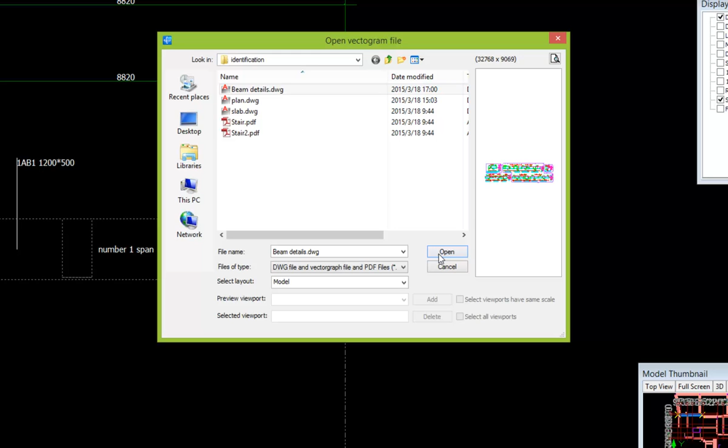Identify beam reinforcement details. Beam reinforcements can be calculated through identifying beam reinforcement details. TRB supports the identification of CAD and PDF drawings. Select the needed drawing, enter the proper scale in the dialog box.

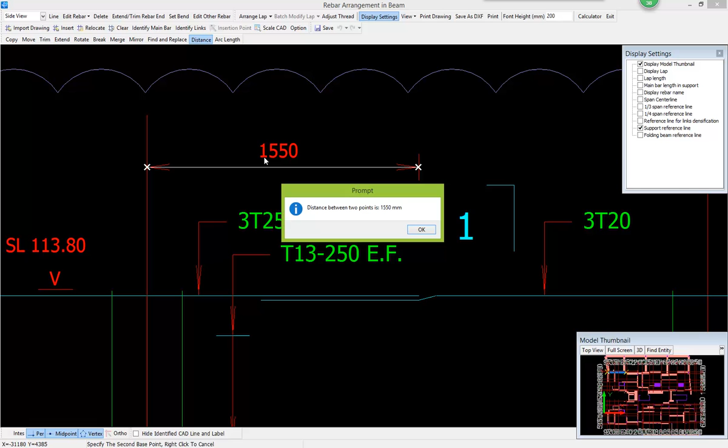You can use the distance function to measure the distance between 2 points so that you can see if the scale is correct. If not, you can click Scale to adjust it. There are two kinds of rebar identification: Identify main bar and Identify links.

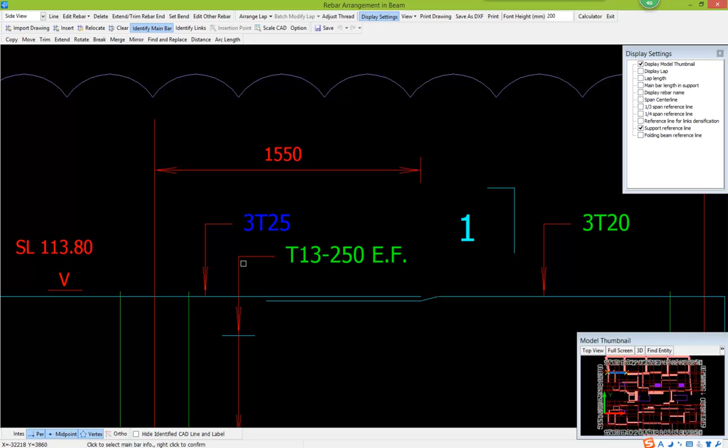Let's take a look at Identify main bar first. According to the hint at the bottom, select the bar info and bar lines. Then select the rebar type and confirm to generate.

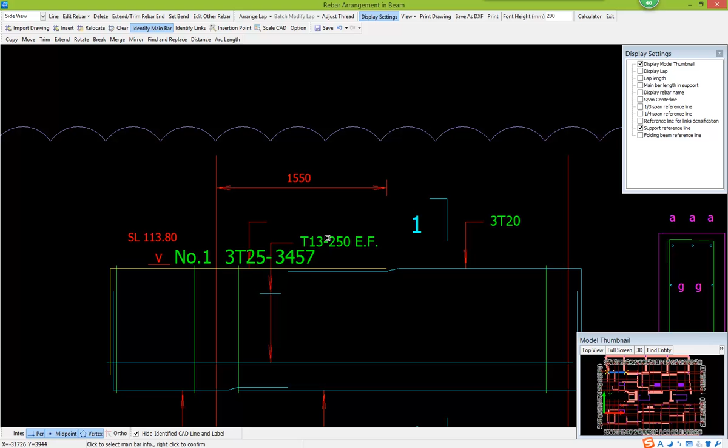If there are too many entities in the drawing, which makes it hard to tell the entity's identification status, you can choose to hide these identified ones by checking this. As for main bar info that contains spacing data, you need to input the correct section size as it affects the number of main bars, and the number will be calculated automatically based on the section size.

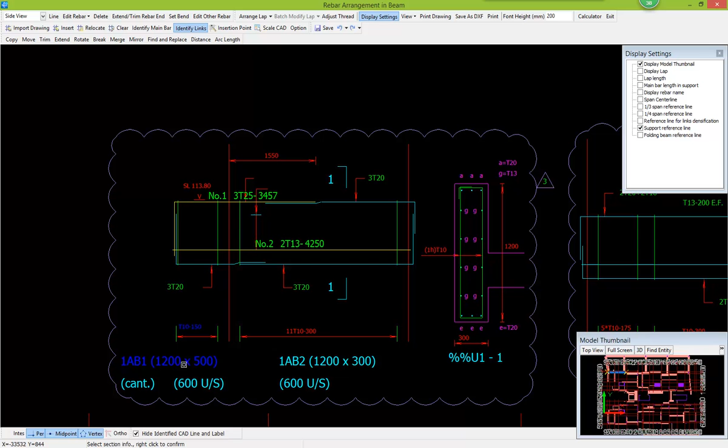Now let's go to links. Select links info and section size info, and then draw a line with a certain length to describe the range of links. The quantity of links, depending on the format of links info, is identified directly from the links info, or it is calculated based on the spacing info and the specified range.

The main bar info affects the calculation of links, so you have to input the correct main bar info. Software reads the section size as width * height by default. If the drawing gives the opposite one, you just have to check this item and the data changes accordingly.

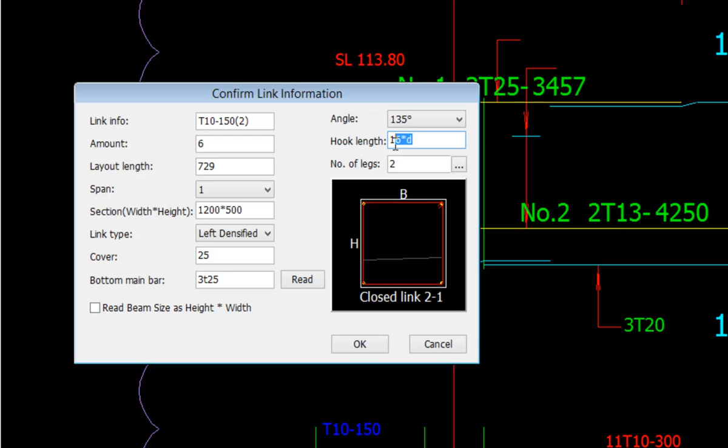Hook angle and bending value take values from project settings by default. Legs info is identified from links info, and it can also be editable. Click the ellipsis button to select corresponding link drawing. Check the info and then generate links.

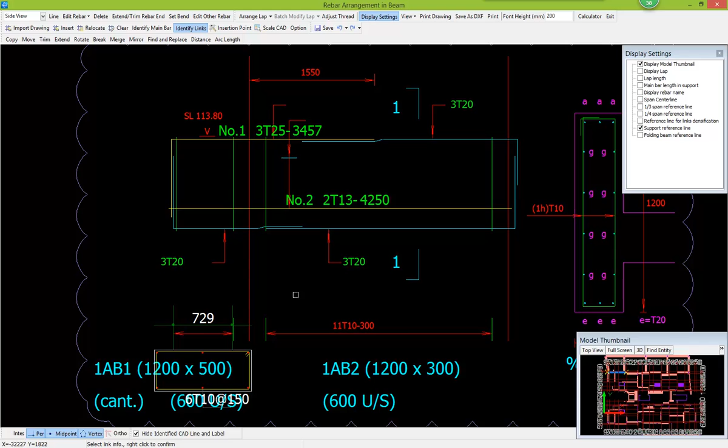You can switch to the next entity through the preview window to continue the rebar identification after you finish the current one. In case the drawing is not clear enough to identify, you can draw a line to arrange reinforcement. Draw the bar lines.

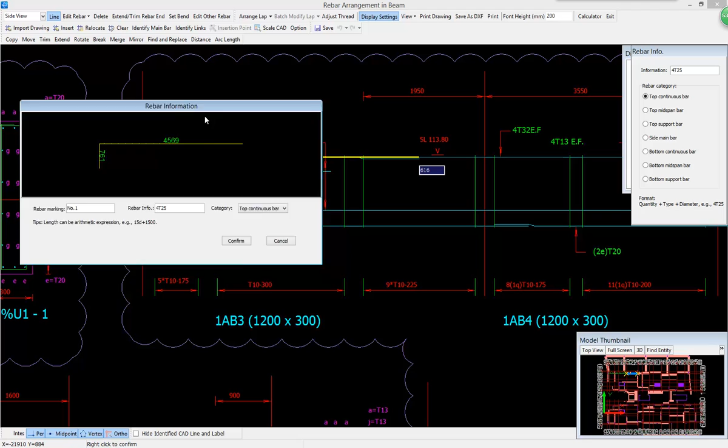Edit the bar length and type in the rebar info. Select bar type and then generate reinforcements. To avoid quantity data loss resulting from an unexpected system exception, we recommend you save the project on a regular basis.

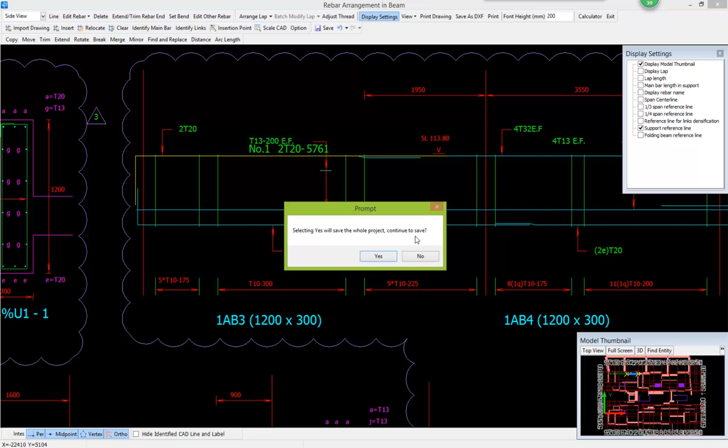Identification completed, the rebar quantities in this beam will be calculated and locked automatically. You can press F11 to view them.